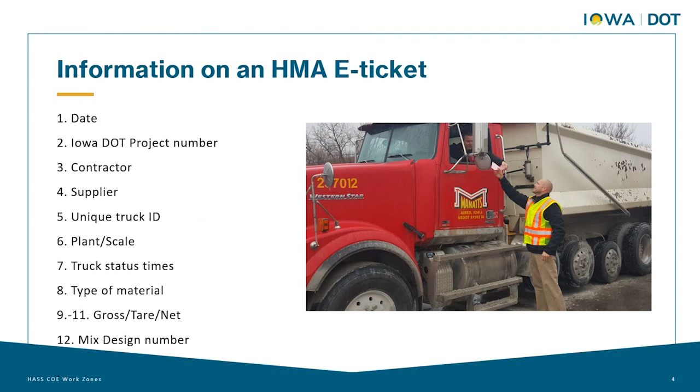So the first thing is e-ticketing. I think what's important to know on our e-tickets, we're using asphalt, concrete, and aggregates. We're getting 12 data fields on an HMA ticket, for example, and 21 data fields on a ready-mix concrete truck.

But with an e-ticket, we actually find that we're capable of getting around 275 lines of data. So you can actually extrapolate a lot of information from that ticket itself. We use an application called EDOT.

This is a HaulHub product. It's an application where you can see all of your tickets. You can scroll through and see how those materials are being delivered to the site. And with that information, we are tracking where the inspector is actually standing.

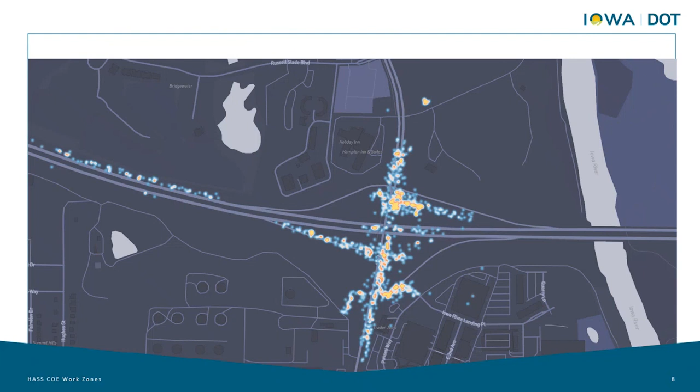And they've added a feature where they can identify work zones. So you can see here through the heat map, these are the locations where all of these tickets are being located each day, and we can go into that information.

We can see things like pictures. We can see different components of that ticket. A feature that they have built in is a work zone identifier for specific work zones.

So the inspector basically draws where they're going and which direction, and with that, they can then toggle which sections of road are actually closed. And what happens is when that e-ticket is generated, the work zone data exchange request or device feed goes through, and it signifies that this is in fact an active work zone.

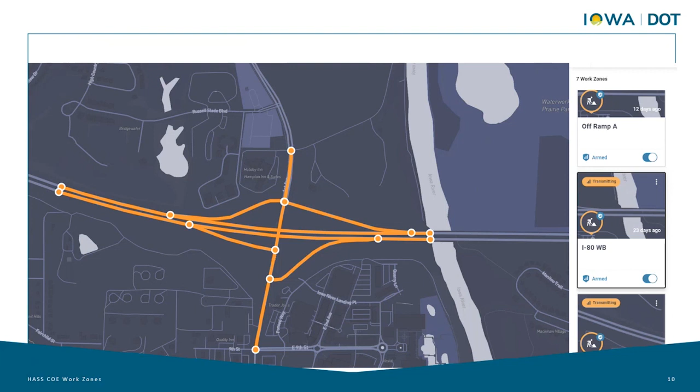We're able to delineate where the end of the work zone is, basically through what that inspector has submitted. And it looks like this when it comes through on Waze. So you'll see that it's got a road construction, reported by a DOT project, and basically it gives you a beginning and an end.

In this case, they had all of them toggled. So when that ticket was created, it actually toggled all of these work zones. So the inspector does need to toggle which ones are actively being used.

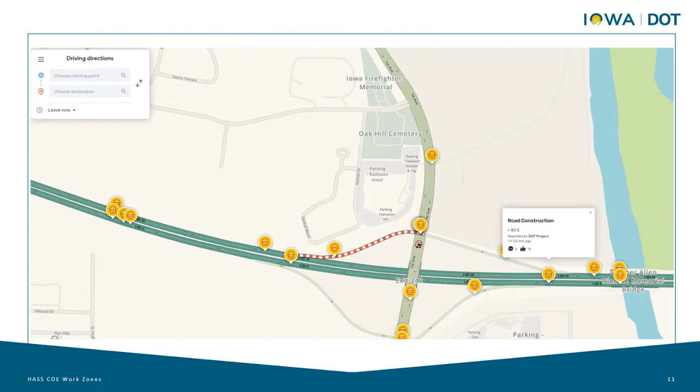With that information, we can then send it to Waze. Now this is different, of course, than what our CARS requests are. Like our CARS request, as an inspector, as somebody who's had to fill these out, you could say, I'm closing the right lane eastbound from here to here each day, or the option that many of us have is to say, okay, all the way from this end of the project to this end of the project, for the next 2 months, it's going to be alternating lane closures.

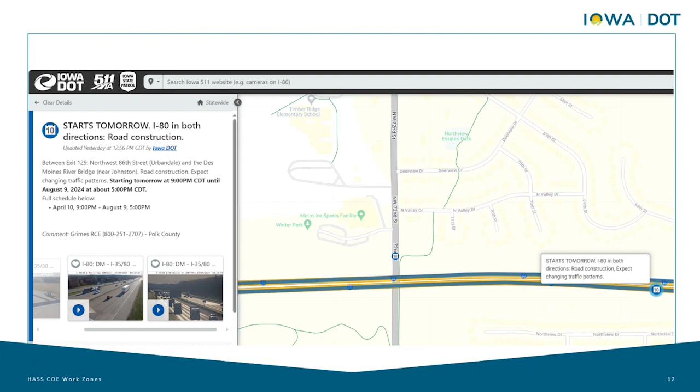So we're not really specifically saying where those lane closures are, just that they're going to pop up in those areas. So really, how do you get definitive information on where these lanes are closed for the traveling public, as well as any automated vehicles that could potentially go through?

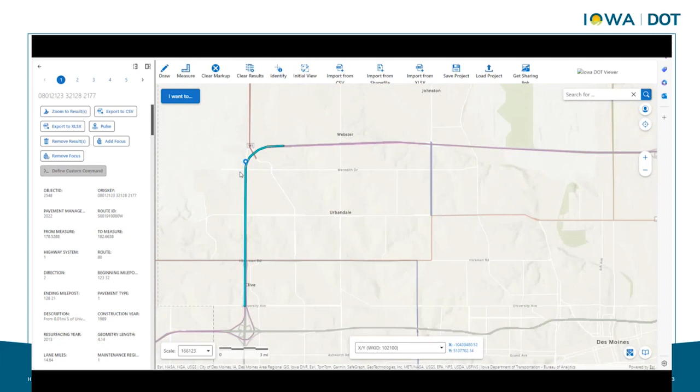We have our pavement map, which identifies the different types of pavements that we have out there, and we can use this information to supplement. Right now, you might say 10 inches of concrete, 3 inches of asphalt. Well, I can actually tell specific information based on that ticket if I bring it through a web feature service layer.

And when we put e-tickets into our Esri system, this is kind of what it looks like. It's really where that inspector's standing.

So it's maybe less ideal in the fact that it's not the specific placement, but it's much better than what we had before, which was basically written on a piece of paper that goes into a shoebox somewhere. Now we can see all sorts of information, like who received it and where it came from.

So we were one of 10 states that got an ADCMS grant, that's Advanced Digital Construction Management Systems. What this does, at least this is the goal, is put the design information from the CAD drawing into our GIS system and supplement it with all of our construction information. We're hoping this will bring us to the next level in that digital as-built.

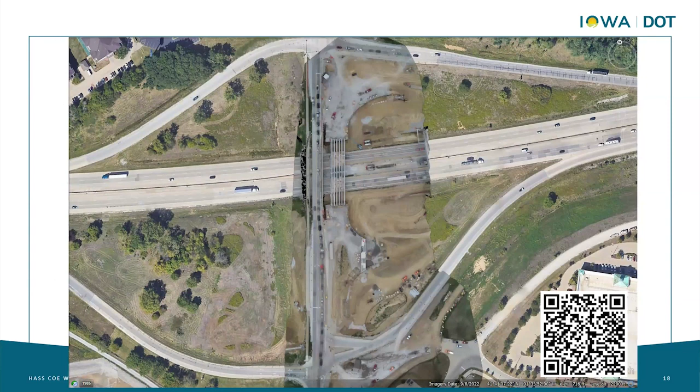So just to give an idea of what a digital as-built looks like, here's a Google Earth view of an intersection we were working on. We bring in the GeoTIFF from drone imagery on the active project, put in the design line work so we can see where the road is being built, and supplement it with all the e-construction information collected. That's meant to give an up-to-date, real-time assessment of what's actually happening on the roadway.

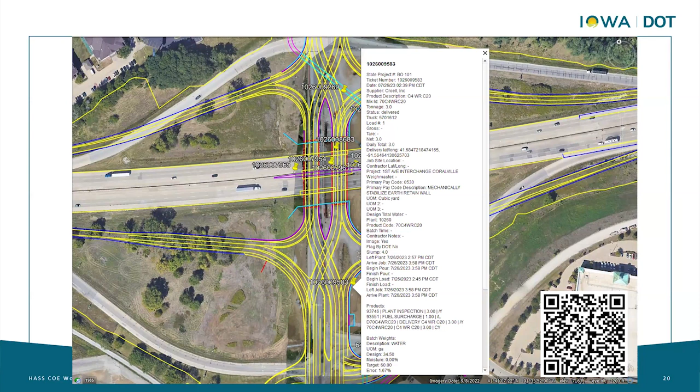When we build a new lane, for example, how does that autonomous vehicle know it's there? This is a way to try to streamline that process, which can take a couple of years depending on the project, how it's submitted, and how it's manually entered into the system. So we want to automate that process.

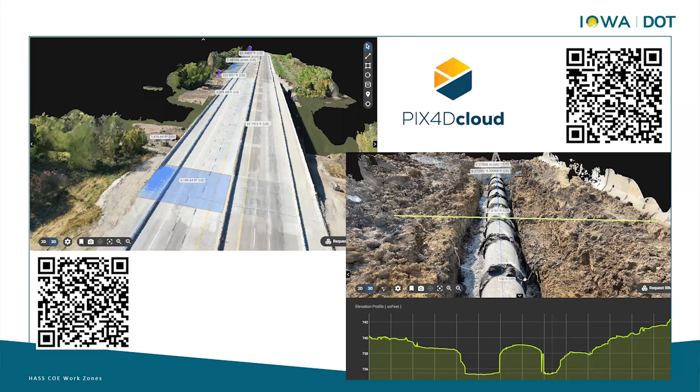We're using things like drones for photogrammetry. In this case we can get a lot of measurement drawings. The one on the left is drone imagery captured in about a 30-minute flight, giving a lot of detailed information. On the right side, this is actually done with a smartphone, so we're utilizing the devices the inspectors already have, and they can also get measurement information. We've done this with an IFC model as well, using a program called Propeller.

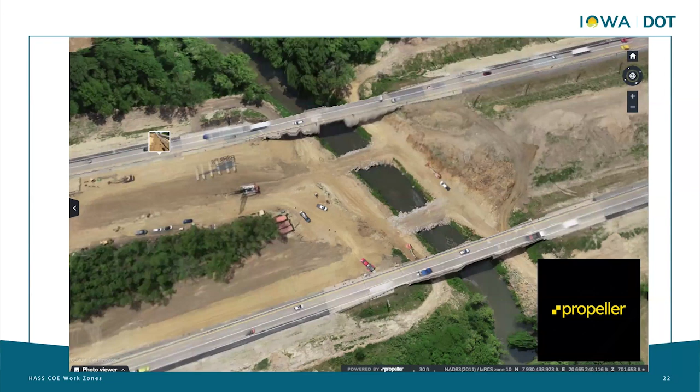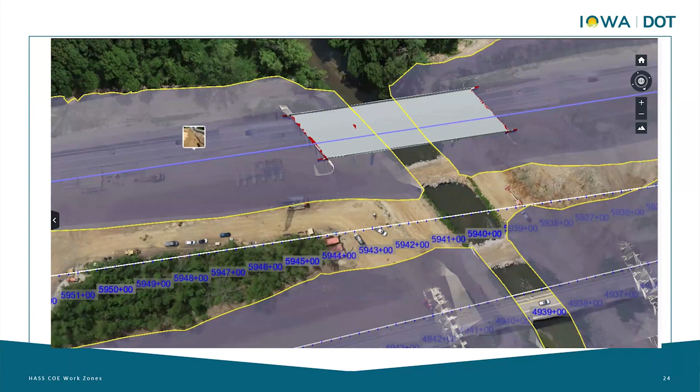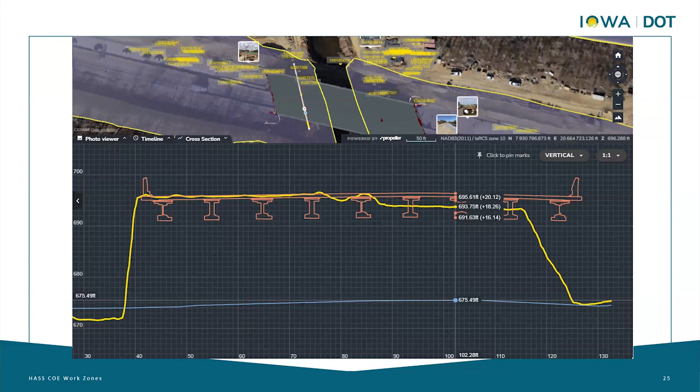So here's an example of a drone flight. You can see a picture someone took with their phone, and we can bring in the IFC model so we can see where that new bridge is going. We can see the terrain, the station and offset for all those locations, and cut a cross section to see where the terrain is by design, where it actually is, and where that IFC model is going to be. Those yellow tickets are the e-tickets, and this is an overhead view of all these things coming together to give better digital information about what we have for lanes and other things.

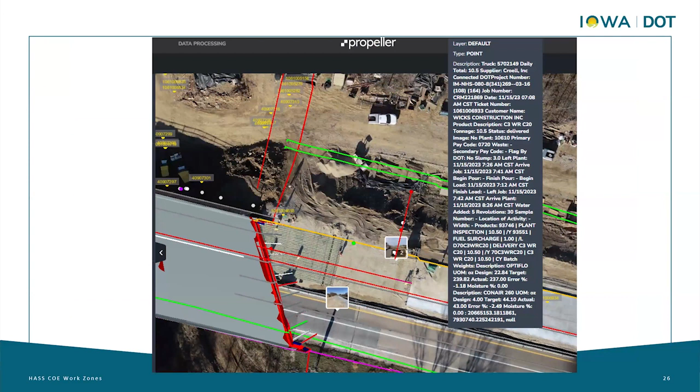We're looking at connecting the equipment itself as part of our ADCMS grant. We're partnered with Delaware, so we have a special provision, capturing things like equipment ID, engine state, latitude, longitude, and fuel percentage. This is fairly basic information, but it gives us a lot of detail for those work zones. We're hoping to use that to populate the work zone data exchange per the ISO specification, connecting OEMs through the e-ticketing provider to share to the work zone data exchange through that device feed. The traffic management center can then filter that based on information from the construction office.

And here's a QR code, I recommend checking this out. If you scan that, it'll take you to the Delaware story map they've created. They've already successfully done this with a paver and a roller, and you can see the inspector there as well. This was taken in real time - they flew a drone over it, and with the timestamp of the drone flight and the workers, they were able to overlay this.

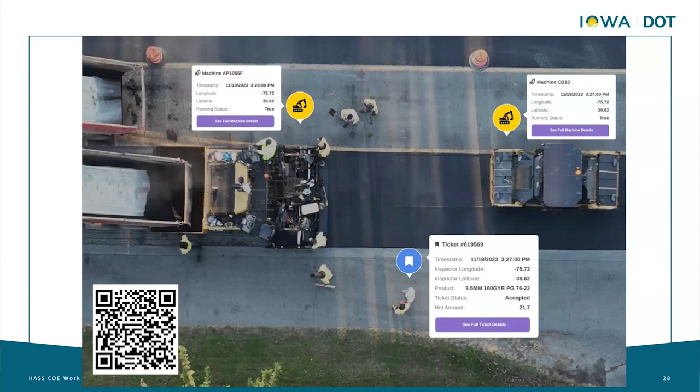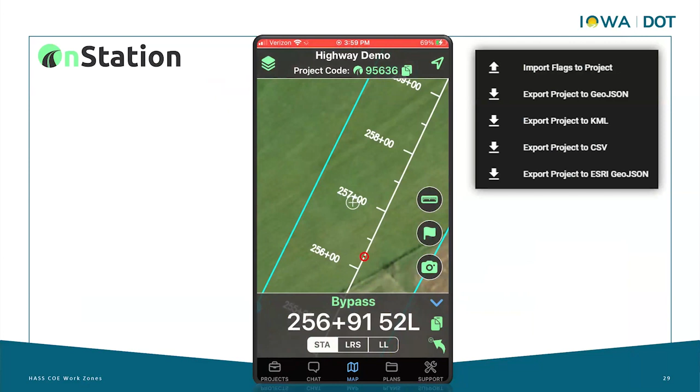So we also use another program called OnStation, and this is yet another tool where we put in the alignment files, so we know where the project is, and we know where the person is standing as they ping their location. The inspector using their smartphone is actually getting their location. So this is another way to use the information we already have. What they're also looking at is how to feed into the work zone data exchange to identify projects that maybe don't have tickets.

We're also working on some research projects with Virginia Tech and InTrans through Iowa State. Some of these projects include a smart vest worker warning system, which will notify the worker when they're close to a cone or if somebody has driven through those cones. We're also doing some things with the dynamic zipper merge system to test out signs providing a feed to connected vehicles, the work zone builder layout application, commercial vehicle work zone information system, and the automated truck mounted attenuator system. You can see here some of the different proof of concepts.

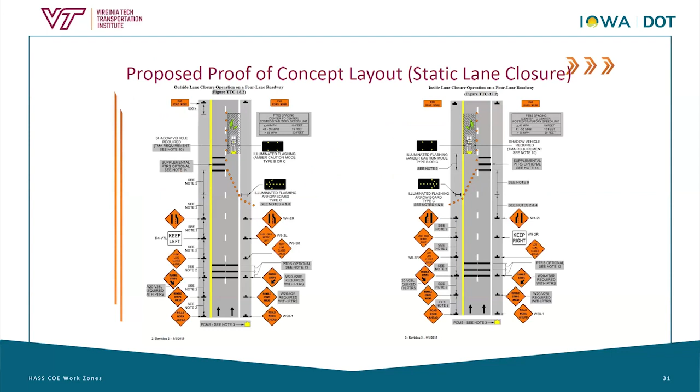We're actually having a meeting here in May to set up a couple of pilots for this research, and we're hoping it will provide some good information, especially for connected vehicles and definitely those automated vehicles as we start to see some deployments rolling out across the country.

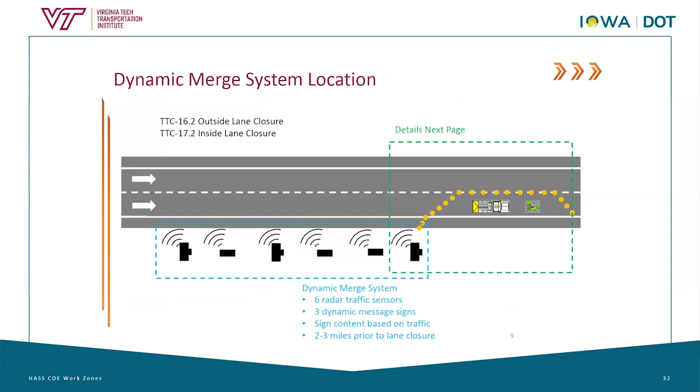Here's an example of some of these dynamic merge systems. You have 6 radar traffic sensors, 3 dynamic message signs, and sign content based on the traffic information. These would be spaced out a couple miles in advance.

Here's the example of the cones laid out when the truck enters the work zone, hopefully providing information to those workers so they can be aware of things going on around them. There's an alarm on the back of the hard hat that will ping if they step outside of the cones, and it also identifies when vehicles enter those cones.

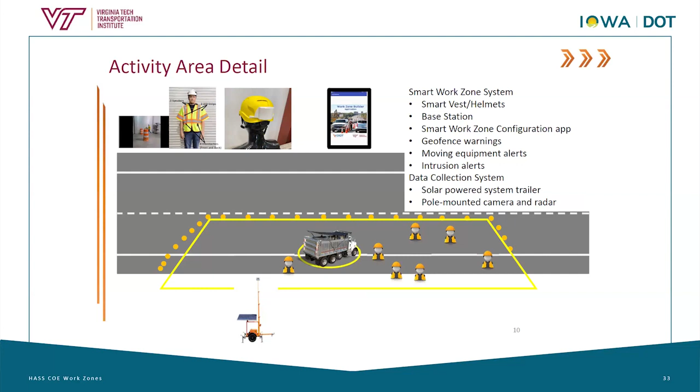We also have the dynamic work zone. This is, again, trying to put out information to the vehicles behind it that might be connected, to identify that this lane is being worked on.

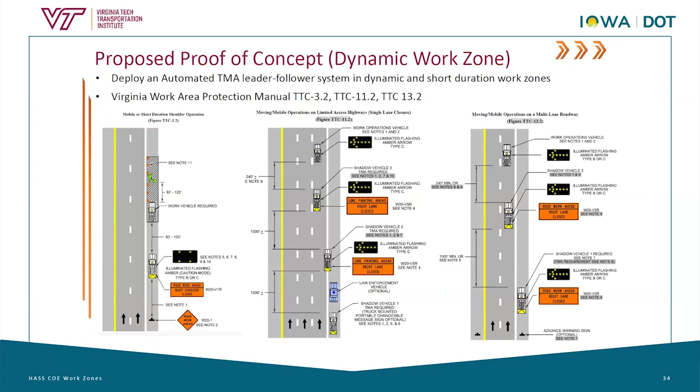Really excited to try out some of these different projects. It's a multi-phase program. Phase 1 we've already gotten through, we're now into phase 3, which is the spring '24 section of the project. In Virginia, they're doing some testing starting next week, a couple of weeks there, and then they're going to come out to Iowa to test out some of these products.

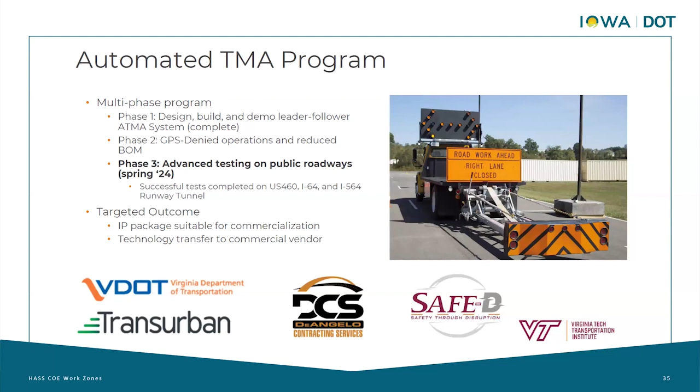Good morning, everyone. Thanks for having me. I'm going to talk about a much less mature series of things here at NCDOT. We've begun to look at dash cams and how they might be useful in some traffic operations applications, one of which is work zones. I'll also tell you a little bit about our SMART grant.

We've begun a relationship with Vizzion, a dash cam image provider. They have an exclusive partnership with one of the largest connected dash cam providers. They capture images every second from every active vehicle they're connected to, giving us images every 100 feet or less. We interface with these images through an integration with Iteris's ClearGuide software, which we currently use to analyze and visualize our INRIX speed data.

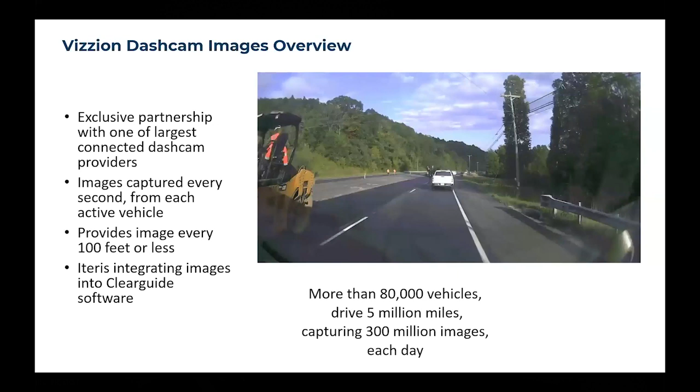Speaking of speed data, back in the mid-2000s we didn't have traffic detection here in North Carolina on most of our freeways, so we used probe speed data to fill in a lot of the gaps. This led us to think—we don't have traffic cameras everywhere, and we aren't able to verify things we've heard might be happening out on the road because we have no camera. Maybe these dash cams can fill in some of those gaps.

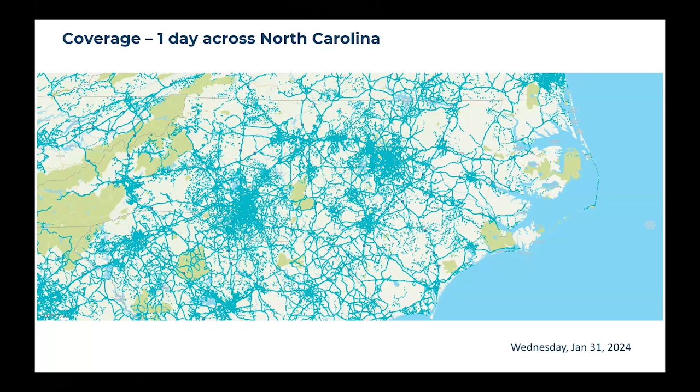I'm personally really excited—I think this is going to be a game changer, like probe speed data was a game changer in the mid-2000s. I think this is going to be the next cool thing in traffic operations. It's not everywhere, and that's what you'll hear in my presentation, but you can see this is just a random day in January showing how many dash cam images we would have access to in North Carolina.

Privacy is an issue, of course—that's what I get asked when I talk about this. These are company-owned vehicles operated by company employees on company time, and Vizzion reviews the images to ensure personal information isn't seen in the pictures.

They're only available when the vehicles are moving, again to protect people's identity, and they remain on the vehicle until they're actually requested from the software. At one point, I thought it would be cool to have this data and go back, but after talking to our lawyers, we decided we didn't want to go there. I get calls every week from people asking for traffic camera images, and we don't record. If I had these images, I'd be beholden to go back and get them for the public. So we decided to just have access to these images in real time. It's really just verification of what we believe might be happening.

So let's go ahead. I'm going to tell you about three use cases. Two of them aren't work zones, but I think you'll see the idea is something we could use in work zones.

The first time we'd been talking to Vizzion and Iteris, there was a brush fire in Western North Carolina in November of last year due to an overturned truck, and we were running dynamic message sign messages about low visibility. We were checking in with people on the scene, trying to find out when the smoke would clear so we could take down our DMS. Someone on our team said, what about those dash cam images you've been talking about? Could we use those to see if the smoke is still out there?

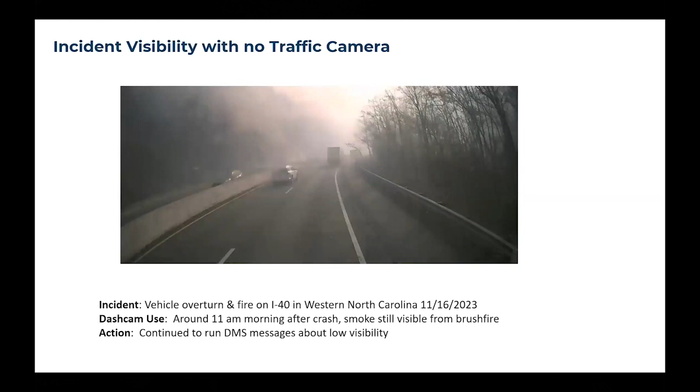So Vizzion mobilized really quickly and fed us some dash cam images, and as you can see, there was still low visibility. We were able to monitor the dash cam images to know exactly when visibility was restored, and we could take down our messaging about low visibility. Again, we knew something was happening, and visual confirmation was helpful.

The next scenario is similar. We have a case in Western North Carolina on a relatively low volume road where there are issues of fog, but the crash history isn't enough to warrant a full-blown fog detection system, which are very expensive. This place doesn't really warrant that. So we were asked, what low cost things could you do in traffic operations to help with this fog issue?

We came up with the idea that since we're a Waze Connected Cities partner, we have access to Waze alerts. So what if we listened to the Waze alerts, and when one came across for fog, we requested a corresponding dash cam image to help determine whether there was fog or not? Then our thought was to activate a sign with flashers. Once we turned those flashers on, we could keep checking the dash cams to know when to take the signs down. Again, it's: something's happening, how can we get our eyes on it?

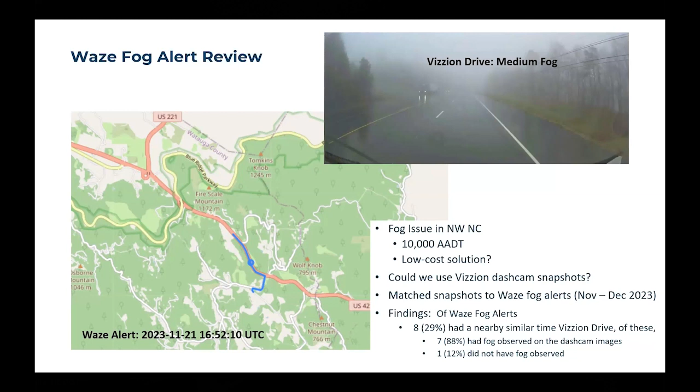We had, I think, pretty good success. The challenge is that only about 30% of the Waze alerts had a corresponding dash cam image. But of those, 88% were actually showing fog. So that part's good, but only 30% of the time we'd actually be able to use this to say, yes, here's a Waze alert and here's a corresponding image.

Now, work zones, what you really asked about. We see the same benefit in work zones. Just like Matt said, we have an existing manual work zone reporting system today. Our construction managers log into our website and enter their work zones, saying things like, we're going to work from May to September, we're going to have intermittent lane closures. But it's hard to know on any given night whether the lane is actually closed tonight. So that information goes to a lot of places, but sometimes it's vague in terms of the exact location and exact times, exactly what Matt said.

So we thought, can these dash cams be helpful in this use case? We could verify the entries in our traveler information system and find any time where the reported time or location of a lane closure wasn't exactly right, then activate our dynamic message signs and provide more accurate traveler information. So we chose four high-profile work zones around the state and looked at 31 times where we knew something was going on, either a crash in the work zone or the work zone lane closure itself.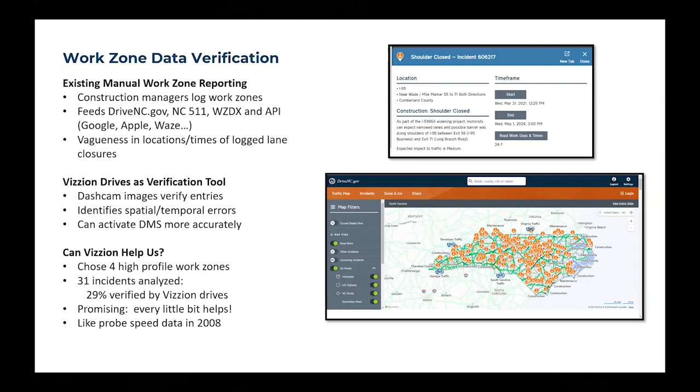And again, in about 30% of those cases, we were actually able to verify that information using a dash cam image. So here's this 30% idea. But I remind myself all the time that when we went to probe data back in 2008, it wasn't perfect then either, right? But it's gotten better and we've gotten more and more confidence. I really feel like this is something that's going to take that same path, that we'll see the quality of the data get better and better as we go on.

So where are we with this? We're hopeful that the dash cam images can help us have more situational awareness for verification for lots of different incident types. We found that about 30% of the things we looked for, we could find a corresponding dash cam image. So 30 is not great, but it's better than the 0 we have today. And I really think this is going to improve.

We're in the process of trying to do a procurement for this particular technology. I don't have a price. My colleagues here on the webinar told me that the price they got was very expensive. I heard a price long ago of $10 an image, but that was a different vendor. So I'm not sure what the price is. I just asked Iteris this week to remind me what the price is for this. So that might be something to consider. But again, I think this probe data was really expensive years ago too, and the prices have dropped.

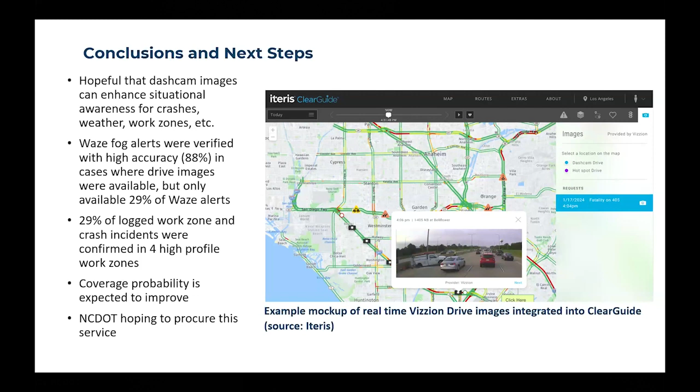So the last thing I wanted to share was about our SMART grant, because it builds on what I just talked about and a little bit on what Matt talked about. As I said, we have this anecdotal information about our work zones, and we want to make it better for connected and autonomous vehicles, as well as just day-to-day people out there driving today in plain old vehicles. So we're doing 2 other projects.

Like Matt said, we're transmitting our connected lane closure information to Waze. That process is not perfect. We haven't really spent a lot of time digging into the quality of how we do that, so this is something I wanted to do more of. Secondly, we give slowdown alerts using INRIX data through the Drivewyze platform to commercial motor vehicles. So we're doing these 2 things in limited application.

So we pitched an idea for a SMART grant, and we received one to make more of what we're already doing. This would be on all freeways in our state, about 2,200 miles of freeways. And what we put out, and we're in the process of putting out an RFP for, is hands-free, eyes-free automated alerts of freeway lane closures and freeway stopped and slowed traffic through Google, Apple, and Waze. Use the technologies that people are already using.

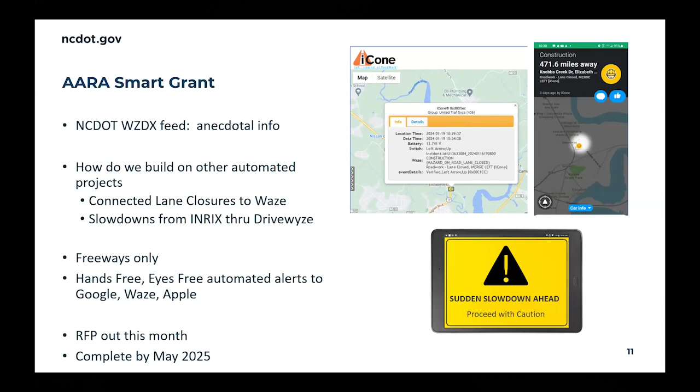So the RFP is in our purchasing group. As some of you know, this is an unknown amount of time it will take to go through this process, but hopefully it will go out this month, and we'll have our grant wrapped up by May of 2025. So I look forward to sharing the results with you after that. And back to you, Ashley.

Great, thank you, Kelly. And I agree, 30% is better than zero. So great job down there in North Carolina.

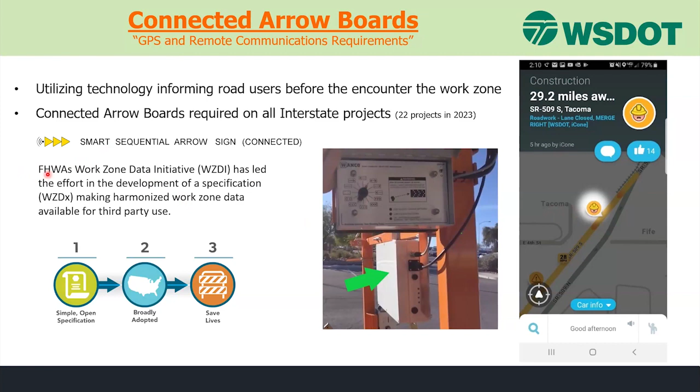And of course, the connected device data flow. So here's where we're at, trying to get WZDX compliant data devices, starting with arrow boards getting those Waze, Google Maps feeds. We also have a translator going out to the National Registry. As of April 2023, we were under development with our data feed specification. Now it's live, so we've joined many other states with data feeds going to the National Registry. We're anxious to get more devices out there in our work zones providing data feeds.

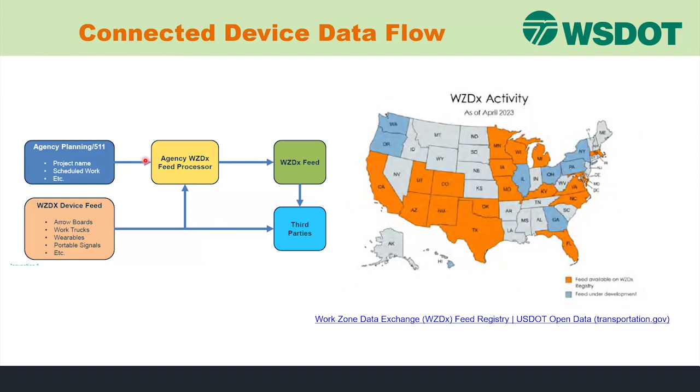One thing we've really clued in on is queue warning systems. We've been finding in Washington, especially in urban areas, that traffic volumes are getting high enough that our work windows for construction without causing congestion are getting so small it's causing constructability issues. So we know we're going to have to create more congestion to get our work done.

On a basic level, we've got specifications, contract specifications, and typical traffic control plans developed for nightly lane closures. When a contractor closes a lane, we'll have a couple advanced message boards leading into that work zone, and a couple roadside sensors—one at the lane closure taper, and another up at the beginning of the work zone. Then our connected arrow board provides those data feeds out to the public as they approach the work zone.

So when the sensors pick up slow traffic—the first sensor at the lane closure taper—if there's no delay, the first message board is blank, and the second just talks about the upcoming lane closure. Once we start to pick up some delays at the taper, we trigger the next message board: left lane closed 3 miles ahead, stopped or slow traffic 1.5 miles.

If we get backed up all the way to the beginning of the work zone, that second sensor triggers the next message: slow or stopped traffic next 3 miles, and then we say use all open lanes, take turns at the merge—trying to encourage drivers to zipper merge when we get congestion, using all those lanes as they get up to the lane closure taper.

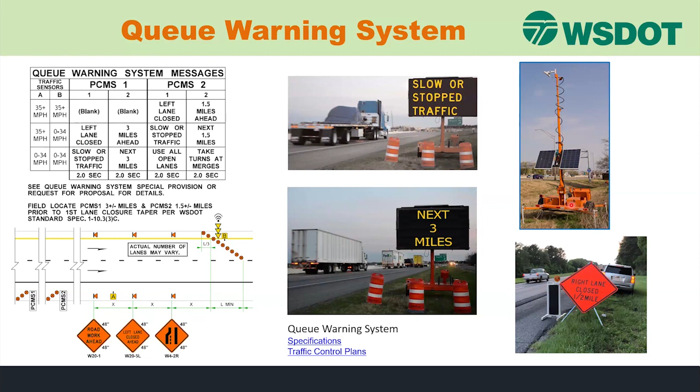And then we have a smart work zone system. Again, we have typical plans and special provisions, contract provisions for including this in contracts. These would be more elaborate queue warning systems, so to speak—longer duration, maybe closing lanes 24 hours a day for a couple weeks at a time, anticipating some pretty good backups.

We implemented a system like this on I-5 south of Olympia, between Vancouver and Olympia, where we had I-5 closed to a single lane 24 hours a day, plus additional nightly lane closures for a bridge deck rehab, or multiple bridge deck rehabs. We anticipated up to 6 to 7 mile backups, and got close to 9 mile backups at times. So we modified and expanded the system, but we were able to provide real-time information about delays.

So not just where the stops are, the delay times, and then again, more zipper merging messages as they approach the active work zone. We did put cameras on some of the message boards, providing camera feeds back to our TMC because we didn't have cameras in the area.

These systems can be really dynamic. You can have message boards anywhere in the state if you want to talk about a high impact closure. So we're doing a lot of training with our regions, trying to get them aware that these systems are out there.

When they could apply, and get more of them in our projects. And actually on the I-5 project, we had closures for 2 weeks, backups up to 9 miles, depending on the time of the week. I went back and looked at the crash data for those 2 weeks, and all we had was 2 property damage only collisions, no injury collisions for those 2 weeks with backups up to 9 miles.

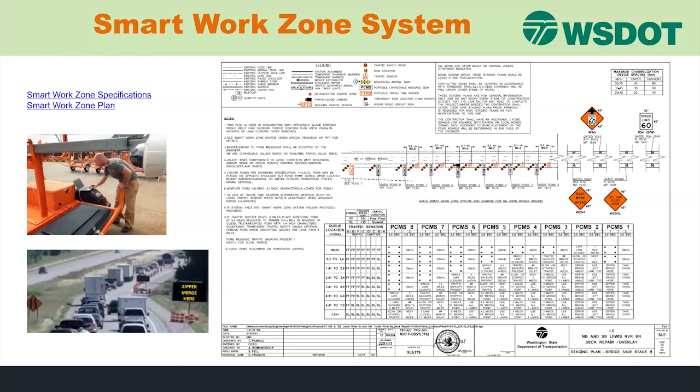Internally, WSDOT-wise with our folks, our incident response program has actually outfitted 49 of our IR trucks with sequential flare devices, along with connected technology, similar to WZDX feeds, providing information to Waze, mapping systems, that type of thing. So of course, incident response incidents that are unplanned work zones.

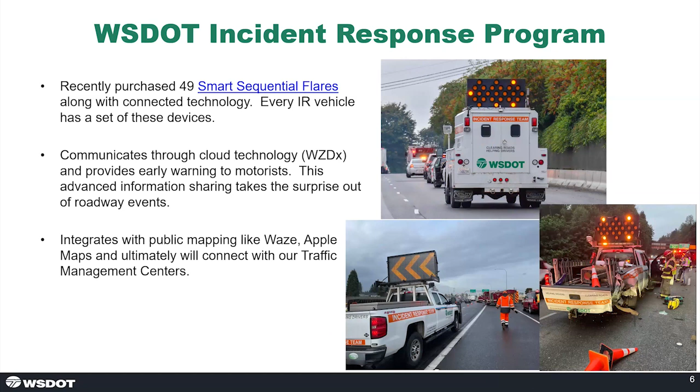Just an example here of those devices in play. This was actually a construction emergency closure in a construction project. Our incident response team was out there, and they deployed a couple sets, I think 2 or 3 sets of their flares. So besides the visual effect, you're getting the automation, the information out to Google Maps, Waze, all of that about the closure.

Our maintenance side of things is struggling a little bit with getting some of this in maintenance. We've been piloting some devices in maintenance, easier to do that way, but to get them into construction projects, we found it's been a little easier. We have a specification, we ask our contractors to provide them, and we're getting what we want.

But the maintenance side of things, because maintenance activities are often unplanned, can make it a challenge for having devices available. We don't have purchase contracts for these devices, so we're buying off the shelf things, different crews buying different equipment. So a little bit of an issue there. And then data service fees, how to manage those, because you've got all these connected devices, and there's data fees that go along with that.

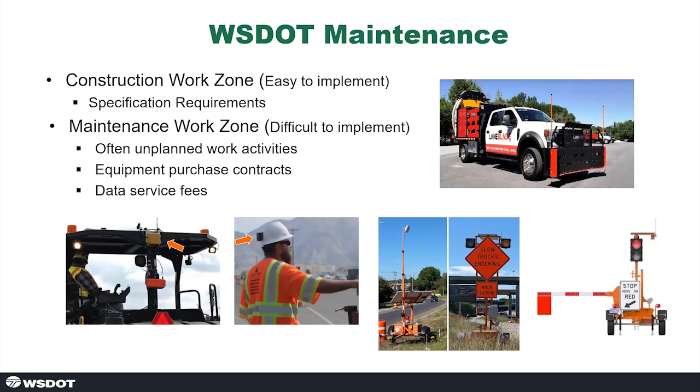So we're struggling a little bit with that, but we are doing some in the maintenance side of things as well. We have what we call maintenance accountability program, MAP teams. These are basically maintenance survey crews that go out, and they've been using some connected devices. So just dropping a PIN device out there, same thing, providing those data feeds, that there's a crew out there, a survey crew out there doing work along the roadway.

Getting good anecdotal results. The crews feel like the public is more aware that they're out there, moving over sooner, slowing down. We've heard from some drivers that they're catching the notifications and seeing the workers, aware of the workers being present. So, good feedback. The crews are pretty happy to have these devices. We've been piloting these and looking to do more of it.

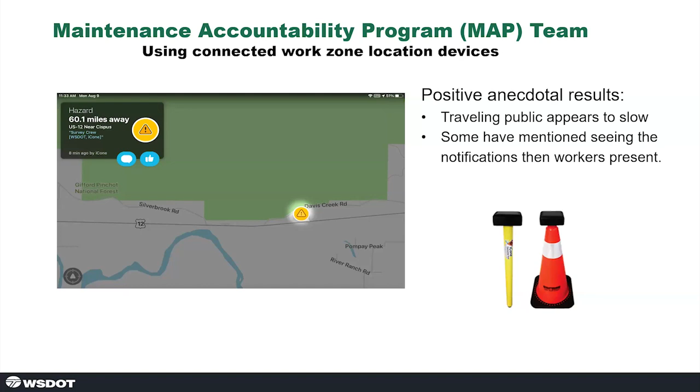Another side benefit we're getting from those devices, in this case, they're actually getting time spent data. So for planning, how long they're spending at each location, getting that data off of those devices when they activate and deactivate them. So a little side benefit there for getting some more information for the work crews.

And then lastly, I want to talk about our automated speed enforcement at work zones. So we're working toward that in Washington. I'm borrowing some slides here from Kyle Miller, our program manager for the automated enforcement program.

Just due to the pandemic, we've been seeing lots of erratic traffic, lighter traffic during non-peak hours, excessive speeding, erratic driving, including over 100 mile per hour speeding. Several counties have seen a 10% increase in traffic speeds pre-pandemic compared to in the pandemic or now.

Average at 12% higher in our 3 largest counties, so King, Pierce, and Snohomish County, 12% higher speeds on a daily basis. So just a lot of speeding, 1,313 work zone collisions in 2022. 242 crashes attributed to high speed alone.

And of course, our work crews and our maintenance crews are just seeing more close calls, more high speed incidents. Actually this year so far, we've had 2 serious collisions in our work zones, sending 9 of our maintenance crews to the hospital to be checked out from work zone collisions related to speed.

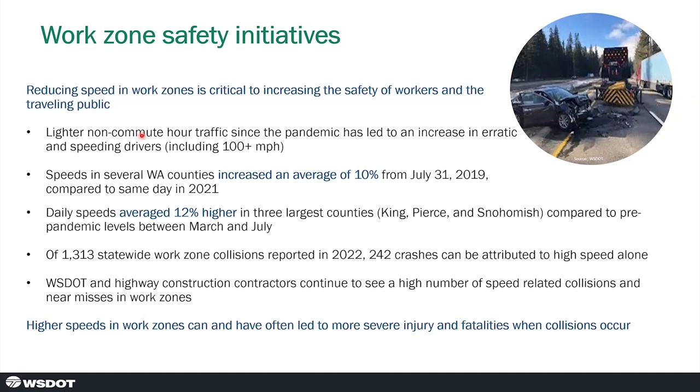So it's something that we've been really trying to get a handle on. So actually, we proposed agency legislation in conjunction with the industry, labor's union, for speed safety cameras.

And actually in 2023, the bill passed unanimously. In this last session, we updated the program, and now we have an RCW, Revised Code of Washington, allowing automated speed zone or work zone enforcement in active work zones. So we're hoping to deploy that early next year.

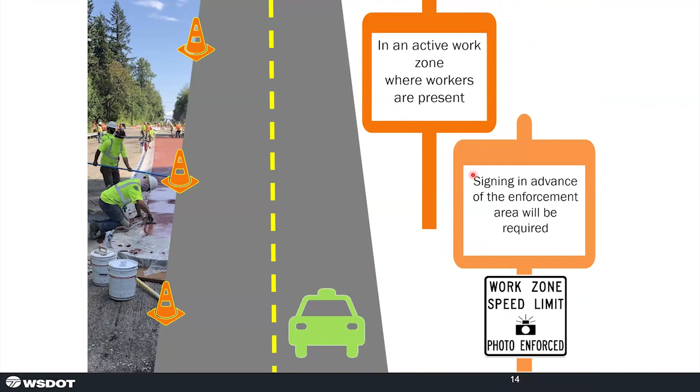So it's going to have to be active work zones, and I bumped through the slides. So we're going to have workers present, so there has to be workers present. We're going to add signs, so we have to sign that there's going to be work zone speed limit photo enforced. So we need to have the signs up there.

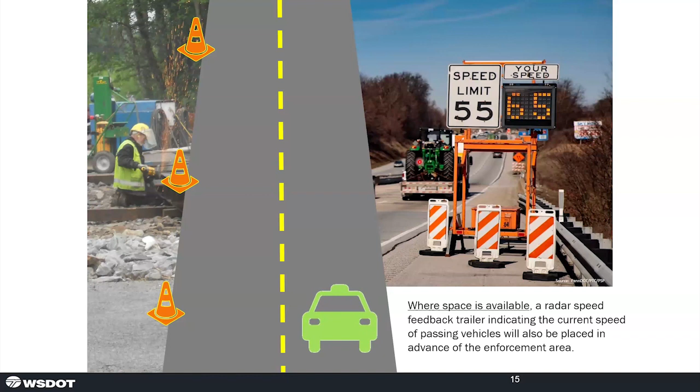Where space is available, we're going to use our speed radar trailers. We've been using the speed display signs in a lot of our work zones. So our bill does say when feasible, we need to provide these feedbacks as well, letting the driver know that it's photo enforced, showing what the current speed is, telling them what their speed is. After that, then they can encounter the enforcement vehicle, which will be a marked vehicle in the work zone.

We plan to move these around all over the place, Seattle, Spokane, Vancouver, all over the state. We're going to try to cover the state as much as we can, get this awareness out there, get the citations out there.

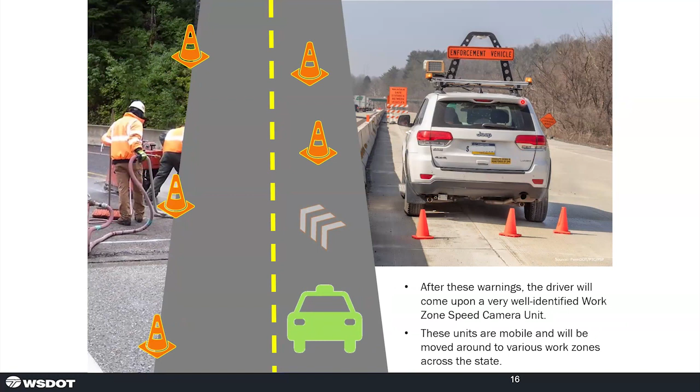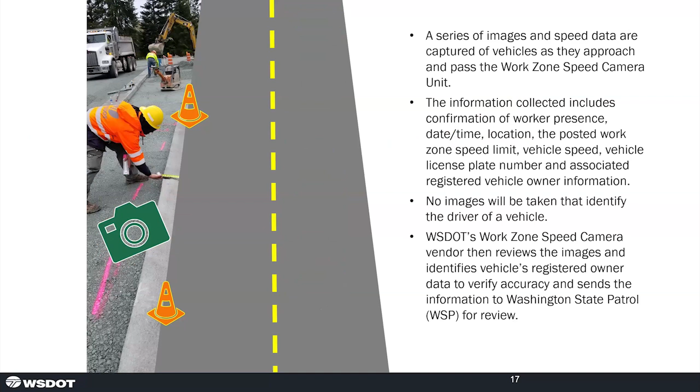So the system will collect a series of images. It's going to collect worker present, time of day, location, posted speed, vehicle speed, license plate, and the registered owner's information. And then all that imagery will be checked out and transmitted to our state patrol.

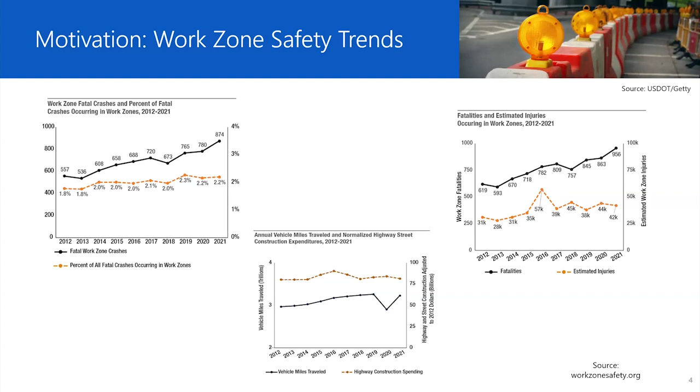Go to the next slide. We've got a summary report we put out, the identification of national work zone safety objectives and activities. If you're not familiar with it, the report presents 11 specific strategic objectives to enhance work zone safety nationally. There's a link there, so take a look at it if you're not familiar.

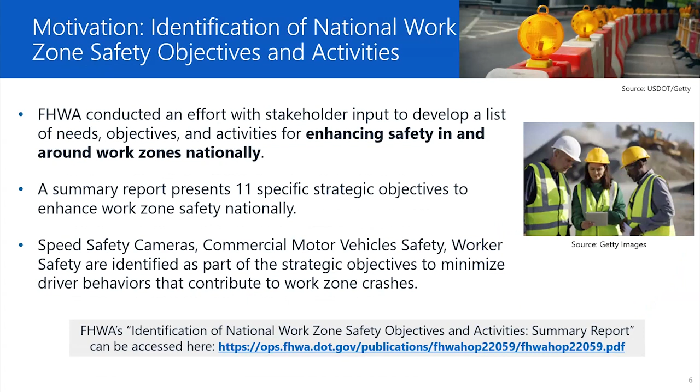So if you're not aware of the work zone data exchange, reach out to the folks on our work zone team and please try to learn more about it. I think it's really cool, and I think it's going to make a big difference, both for the near-term operational needs of DOTs and the long-term needs of automated driving systems and other technologies and automation in the future.